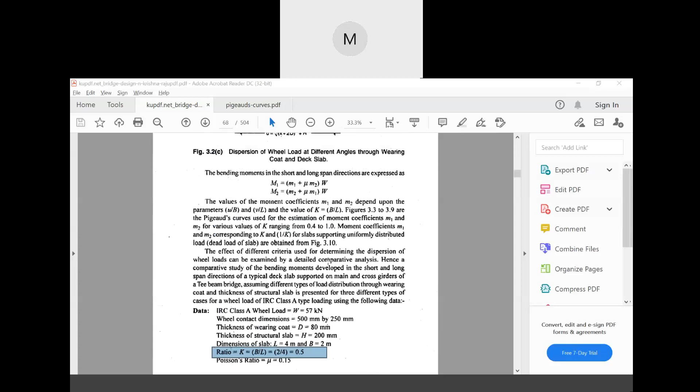Did you take out your Pigeaud's curve? Now if you can see here, first of all, the question, it is given as what?

You will have to find out the dispersion of wheel load for different cases. So we will be basically having three cases as we discussed. Now number one case will be what?

The case one will be dispersion of wheel load through wearing coat only. So for this purpose, this is the diagram that will be dispersion of wheel load through wearing coat. Okay, you have to refer to this diagram.

Okay, now if you see here, dispersion of wheel load through wearing coat only. So in the figure,

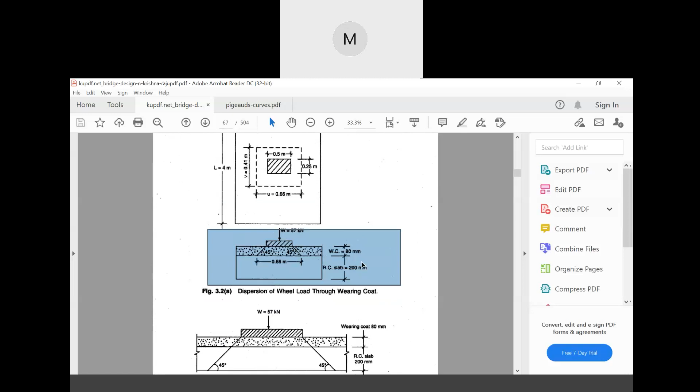Now this formula, this u and small v formula, if you can see this diagram, here if from this diagram, if you read this literature part, then you will be able to find that

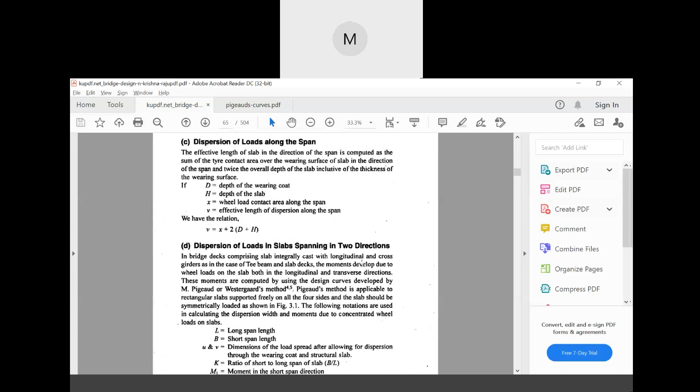the dispersion of wheel or track load may be assumed to be at 45 degree through wearing coat and structural slab according to clause. Consequently, the effect of contact wheel or track load in the direction of span length, that means in the direction of span length, is equal to the dimensions of the tire contact area. That means what?

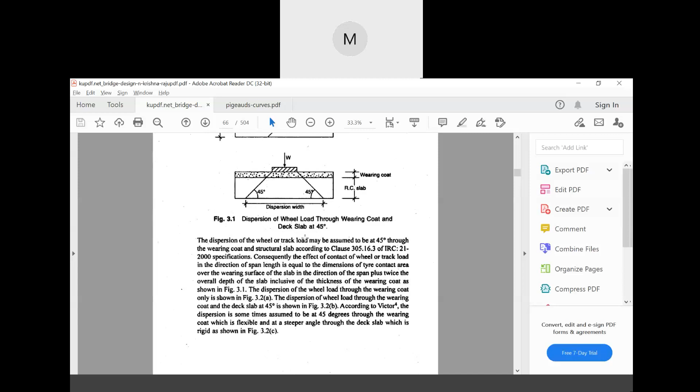In the direction of span length means this is u. It's equal to the dimensions of the tire contact area over the wearing surface plus twice the overall depth of the slab. So this depth was given as 80 mm. Yes, the question, if you see your question, it is given as 80 mm. Okay, so this is what the formula has come from.

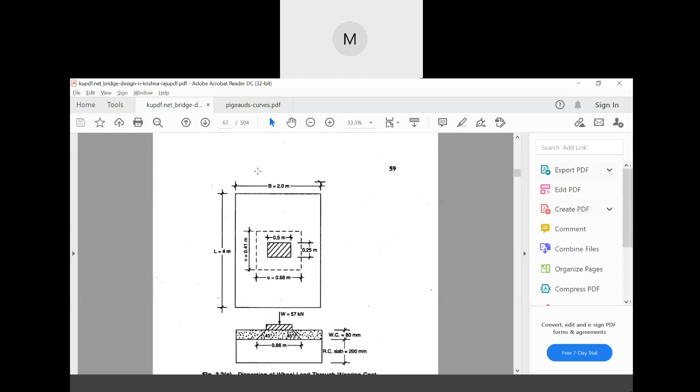So if it is in the u direction, then this one is small u. So small u equal to how much? 0.50 plus 2 into 0.08. So in this way you will have to find out. Just remember it, do not forget.

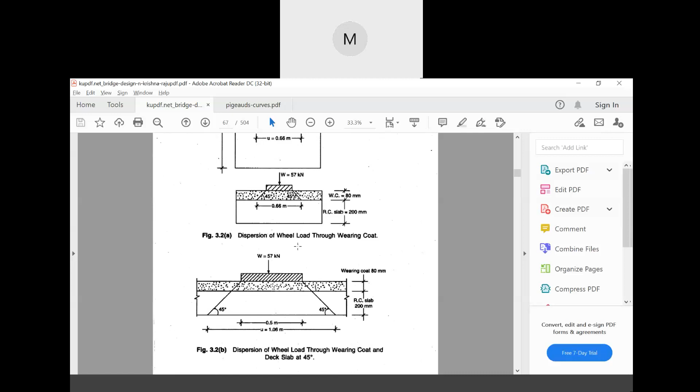Now similarly, this small u. So that is why the answer is 0.66 meter from this figure itself. So this is actually the contact load, 0.5 plus 2 into 0.08.

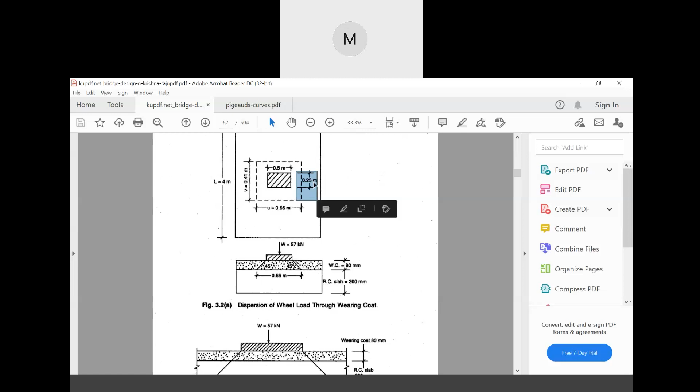Now, for finding out this V, what you'll have to do is 0.25, that means this side. There was one parallel to it. So this came from that wheel load. If you see IRC class A wheel load diagram, so 0.25 plus 2 into 0.08. 0.08 why? 0.08 is given as the thickness.

Okay, now you got small u and small v. Now we'll have to find out what? Small u by capital B and small v by capital L. The u by B and v by L ratio you'll have to find out, which is very important. And you have to find out k equal to b by L.

Now, once you found out u by b and v by L, this capital B and capital L, these are all given in the question itself.

So now if you find out k equal to small... Any problem? Anyone? Any problem?

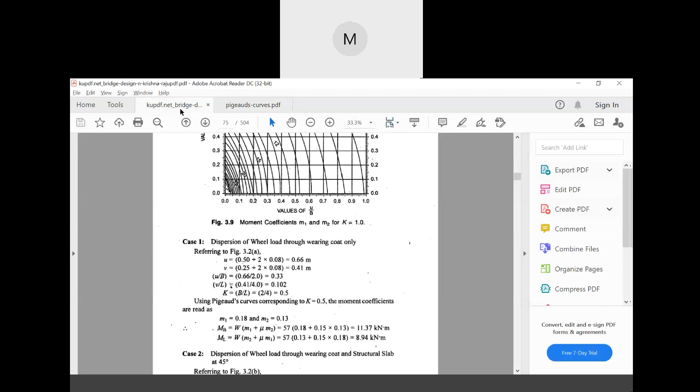Okay, so you have doubts on U and V, right? I'll explain it again. Wait, students, why? Can you do one thing? Hello, so if you have any doubts now, you can just interrupt me. I don't have any problem. After I speak up, you just interrupt me because I might not look at the chats every time. It might get missed.

Okay, this U and V, let me explain it to you again, just try to understand. This small u, okay, first of all you'll have to see this small u. Now, how will you find out this small u? We'll go to this part.

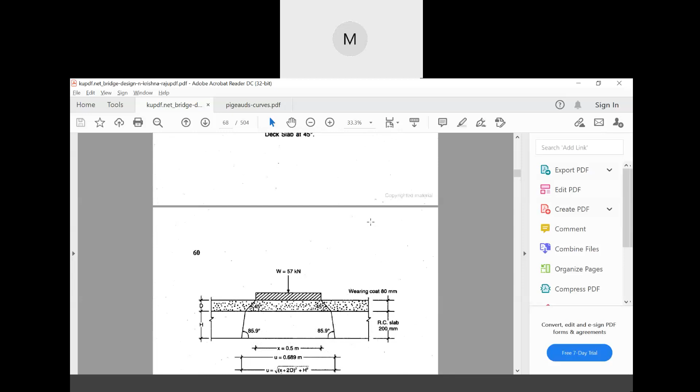We'll go to this part. Now, this small u and small v. So this is what is small u. Actually, what is this? This shaded portion, if you see here, this shaded portion is the what? Wheel contact. That means one wheel will be contacting this portion of the area with the slab of the bridge.

Is it clear? Is it okay? Are you getting till this point? This contact position? Someone please reply.

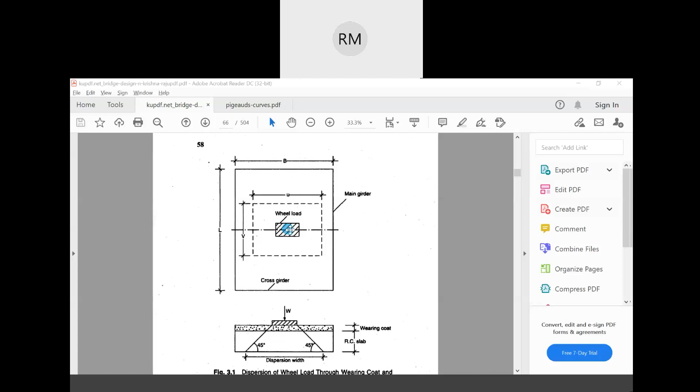Yes sir, okay. So now look at this, pay attention. If this is the wheel portion, that means the portion of the wheel that is in contact, so this is looking like this. If you see it from the other angle, that means if you look at it from this point or maybe this side, if you look at it from this side or this side, it will look like this. It will look like this or not?

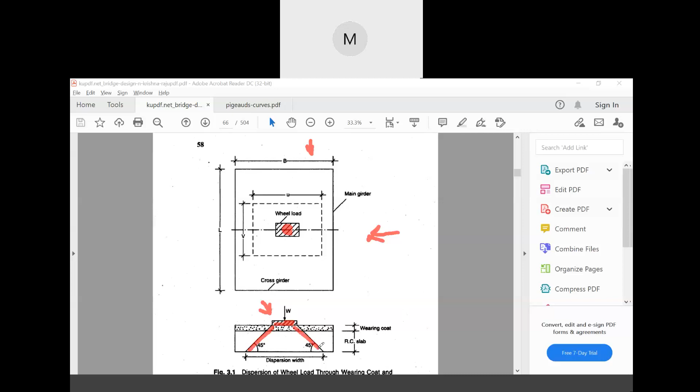Yes or no? Now if it will look like this, you all know this gets dispersed in 45 degrees. This gets dispersed in 45 degrees. Now if it gets dispersed in 45 degrees, then as per Indian Roads Congress formula, this U means what? In this direction, U equal to what?

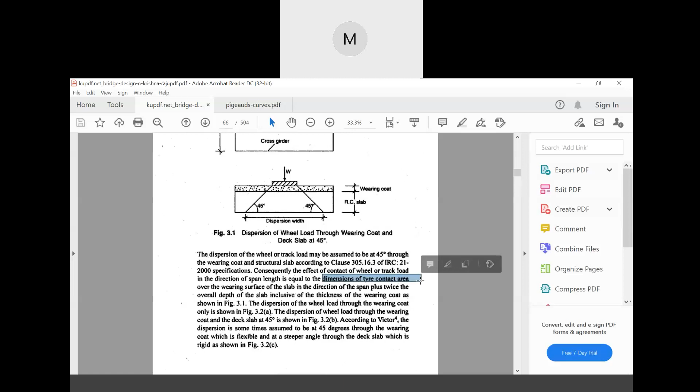The dimensions of the tire contact area over the wearing surface - that means what? U will be this portion, this portion. Now the value of this portion is given in the question as well as in the diagram of IRC class A loading. It is given in the question.

If you see here, wheel contact dimensions is 500 mm by 250 mm. It is given, fine. But if it's not given in the question, and it's given as IRC class A wheel vehicle or something like that, you'll have to refer to the diagrams we covered in physical classes. So it is given here in the question for this part: the wheel contact dimensions is 500 mm by 250 mm, right?

Now if it is 500 mm by 250 mm, so this side, that means in this side, it is 500 mm. So as per this, the effect of contact of wheel or track load in the direction of span length is equal to, it is denoted by small u. That means this small u. The small u equal to what?

0.5, plus - look at this - plus twice the, it is given now, plus twice the overall depth of the slab, right?

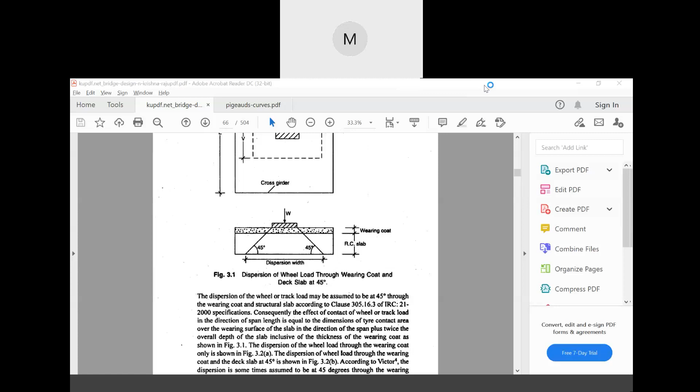Overall depth of the slab for this case, for the first case, through wearing coat only means what? The wearing coat depth is how much? The wearing coat depth is 80 mm, right? See the question. Therefore we can write it as plus 2 into 0.08 - yes, we have to convert this into meters, right? So this will give you an answer of 0.66 meter. So this is how you find out u.

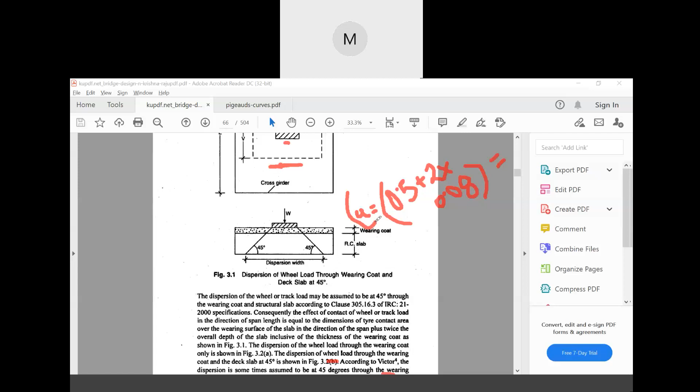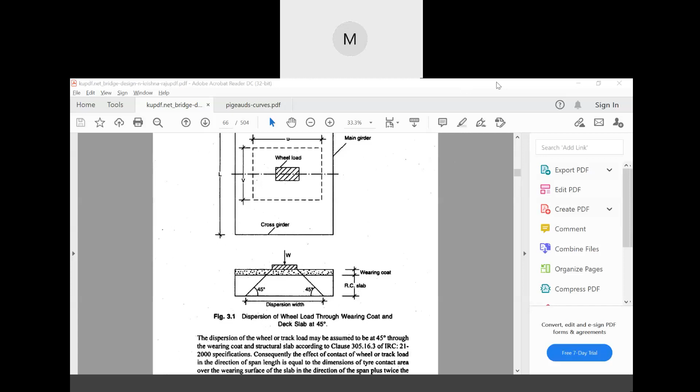Now similarly, if you see here for this v portion, what you have to find out? For u, now for v also, since this is only for this part, this portion is going to remain same. Where will the change be? It will be here. Why? Because for u, we consider this part, right? For v, we will have to consider this part.

So here, in place of 0.5, it will be how much? It will be 0.25. Is it clear now? Is it clear? And here we'll have to replace it as... Is it clear now? Can you please respond, is it clear now?

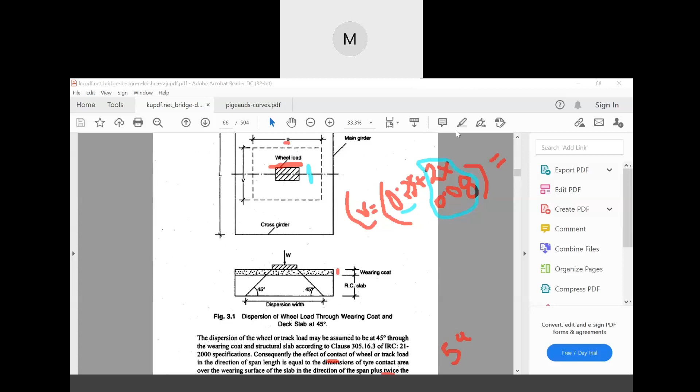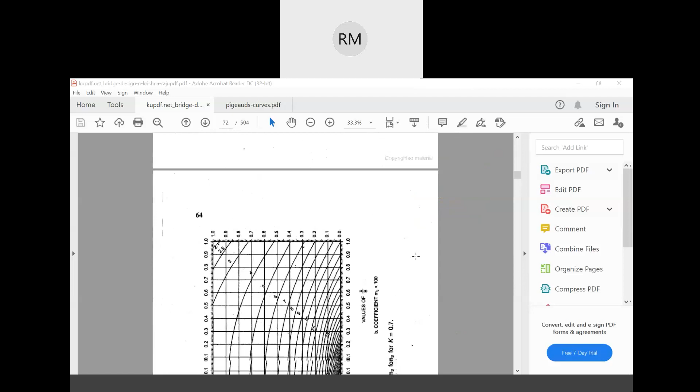Sir, for B, sir, how have we taken 0.25, sir? That is what I'm telling you. For V, look - here in the question, if you see, you didn't write the question. You should write the question, right? I told you that's why, to write the question.

Here, this wheel contact dimensions, this is given na, 500 mm by 250 mm. This came from the very second class we discussed - IRC class A loading vehicle. There, if you see the axle load, there was a table, ground contact area. I remember Rajesh drew it on the board for you guys. So that thing, there will be finding B and W, 250 and 500. From that only we took 500 and 250. Is it okay now? Is it clear?

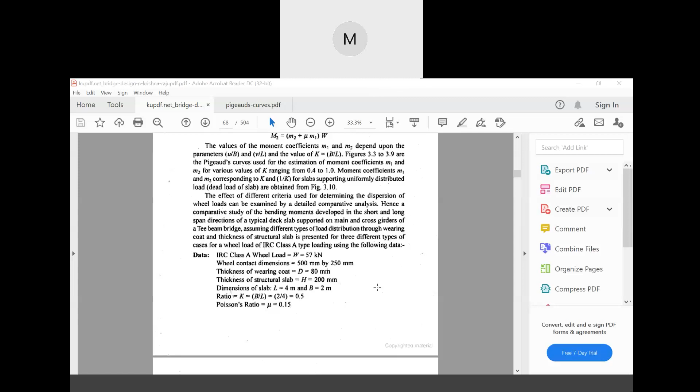Is it clear now? Can you please respond? Yes sir, it's clear. It's okay for you? Michael, is it okay? Yes sir. Yes sir, it's clear sir. And what about others? What about others? Okay fine. Yes good, thank you, thank you for your response.

Now look, you are done with this, right? So you'll be finding out up to this point is over. This is only one part - U and V we found out. Now what will happen? We'll have to find out U by B and V by L.

If you see in the Pigeaud's curve, it is given in terms of U by B and V by L. This is the main purpose behind finding out small u, small b, then small u by b, small v by L. Is it clear? Now what will happen? Look, now what will happen? This k equal to b by L. Always remember this k value you will find out by capital B by capital L.

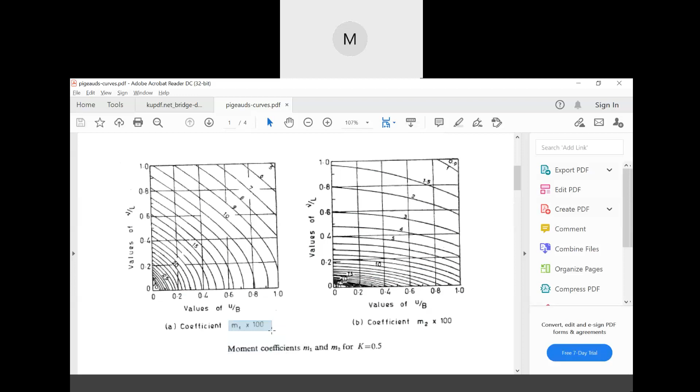Now for correct k value corresponding to 0.5, we found out k value as 0.5, right? For k value corresponding to 0.5, what do you call it? 0.5, what you'll find out is m1 and small m2. Okay, is it okay?

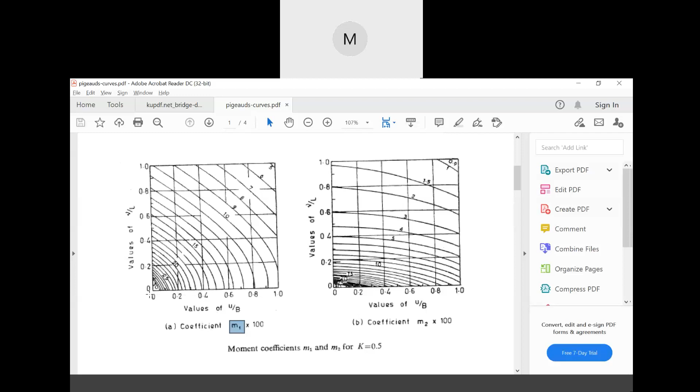Wait, now let us go for small m1. For small m1, how much is the value of u by b and v by l? We got u by b as 0.33, and v by l as 0.102. Now let's zoom in.

Here if it is 0.2, then 0.1 will be somewhere here, right? And on the other side... sorry, just give me a minute. Okay, I'm mistaken. Let's start it again.

Now for u by b, the small u by b value is how much? 0.33, right? Please keep writing the numerical, it will be helpful for you. So 0.2, 0.4 is here, and 0.33 you can consider it here. Yes or no?

So here, this u by b is 0.2 and 0.4, right? 0.2, 0.2.

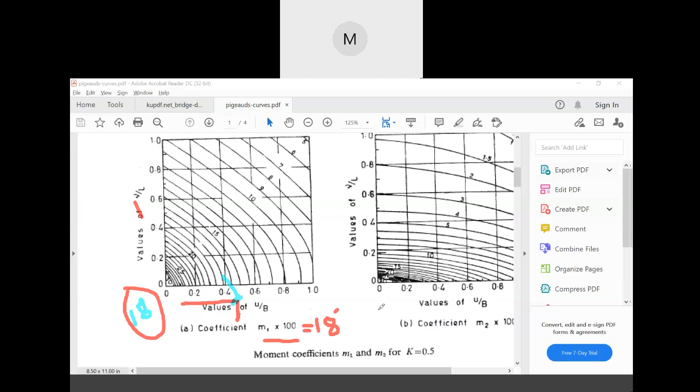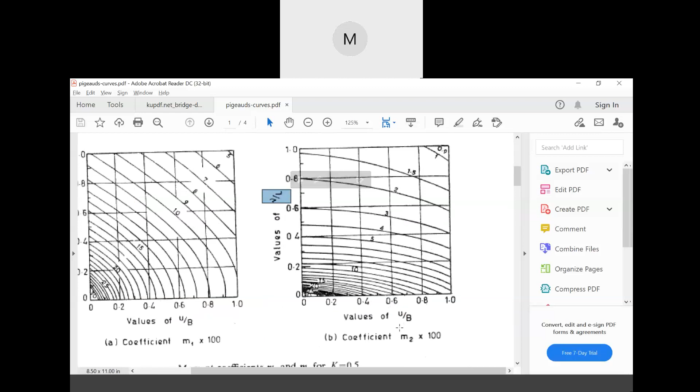So in this way we found out small m1. Now similarly, from this diagram and u by b and v by l values, you will be finding out small m2. Is it okay everyone? So eventually what we are getting: small m1 as 0.18 and small m2 as 0.13. Fine, is it clear? I hope it is clear. I hope this is clear.

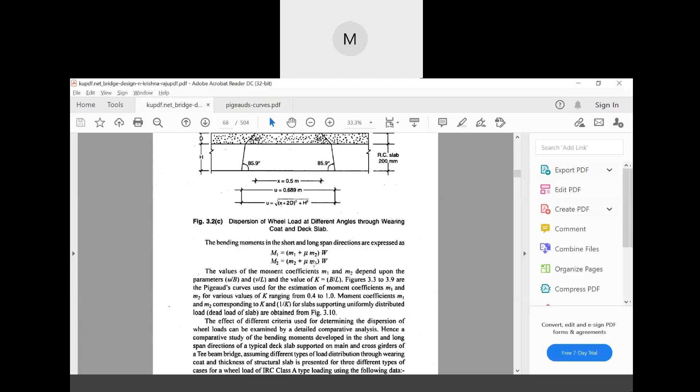Good. So now we'll have to find out MB and ML. Now what is this MB and ML? MB is bending moment along the direction B, that means this formula. Along B. And ML means along L. Now B and L, this is given, along B and along L.

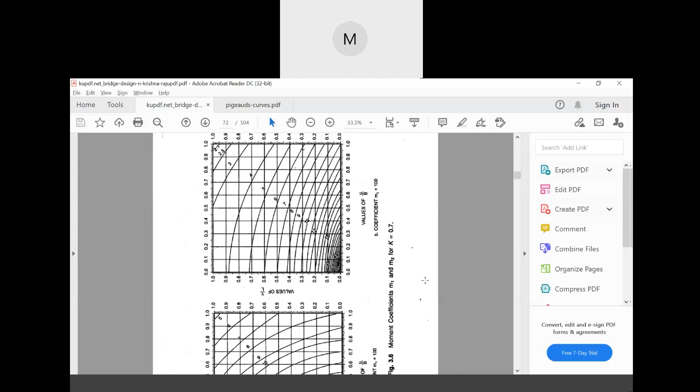Now if you are finding it out along B and along L, how will you find it out? This formula: W into small m1 plus mu into m2. Now W is how much? W is given as 57 for IRC class A loading. So 57 into 0.18 (we got it just now), plus 0.15 into 0.13. Similarly for ML, we find 57 into 0.13 plus 0.15 into 0.18.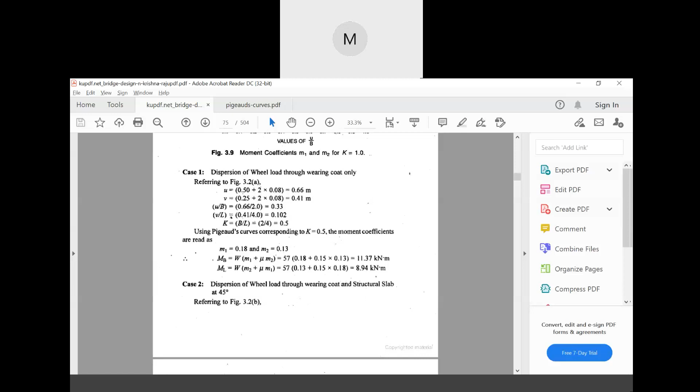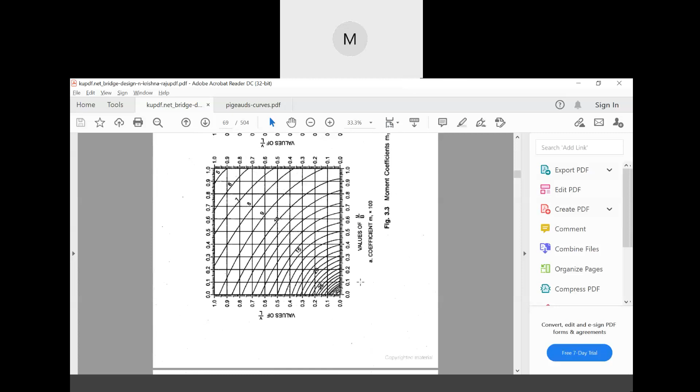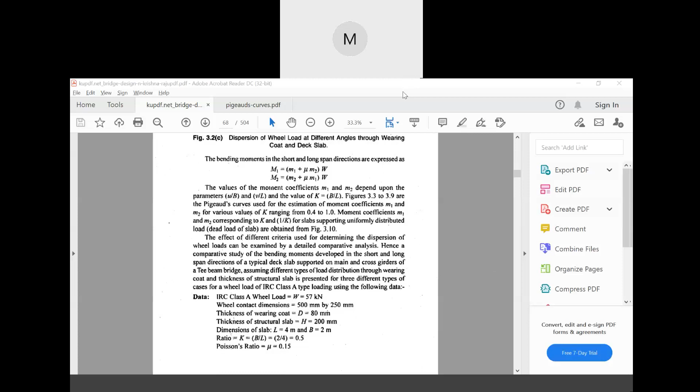I hope this is clear for everyone. This part is dispersion of wheel load through wearing coat only. I hope this is clear for everyone. Can anyone write yes or no, whatever it is? Okay, chalo.

So now we'll have the next part of this numerical. This is only one part. Now, dispersion of wheel load through wearing coat and structural slab at 45 degrees. Now for dispersion of wheel load through wearing coat...